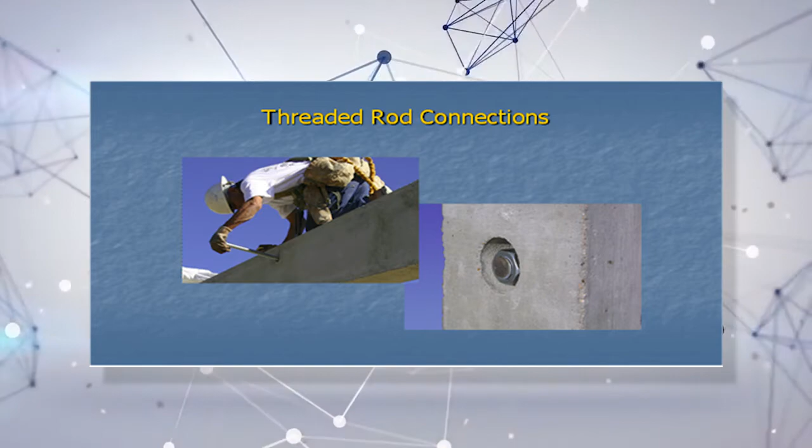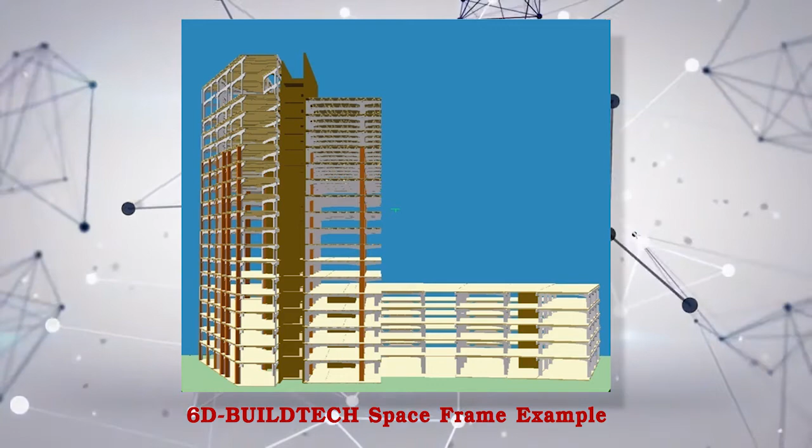The most basic 6D BUILDTECH space frame system includes precast concrete frame and floor elements with two major innovations. First, the space frame system uses precast concrete elements with bolted connectivity similar to that employed in steel building construction. Hardened threaded rods are used to connect the elements without the use of welded embed plates, which have a high fatigue and failure rate. The bolts pass completely through the precast elements.

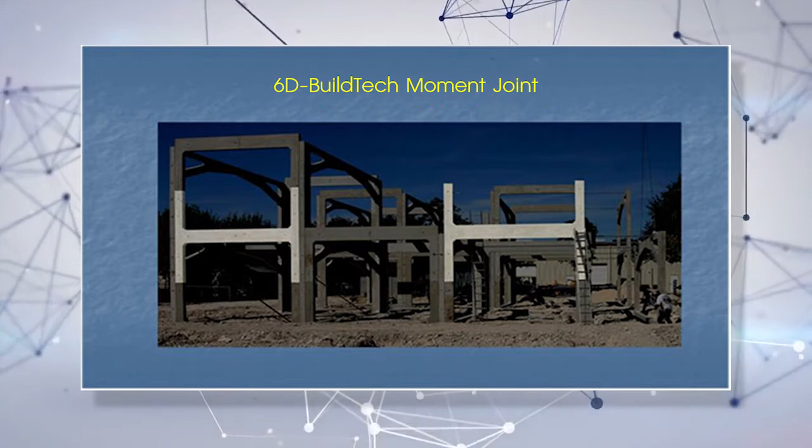BUILDTECH space frame replaces the pin joint in conventional precast using a moment joint. The overlap of the spacer element from mid-floor height on the lower floor to mid-floor height on the floor above transforms the joint into a rigid joint, giving the structure the stiffness to carry lateral loads imposed on the structure.

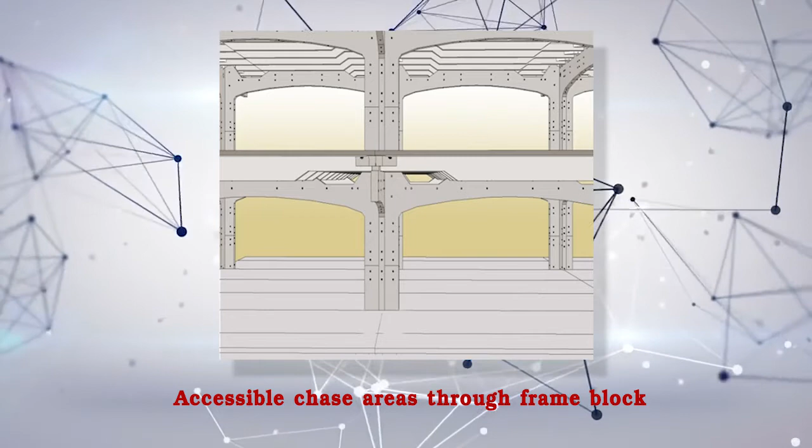Structures built employing this system utilise highly configurable blocks that include the framework, roofs, floors and exterior walls. Structures can be built in time frames not achievable using conventional construction methods. The design and manufacturing of the blocks make them aesthetically appealing, with asymmetric angles, terraces, cantilever porches, etc., more durable than conventional buildings and less expensive to maintain and insure.

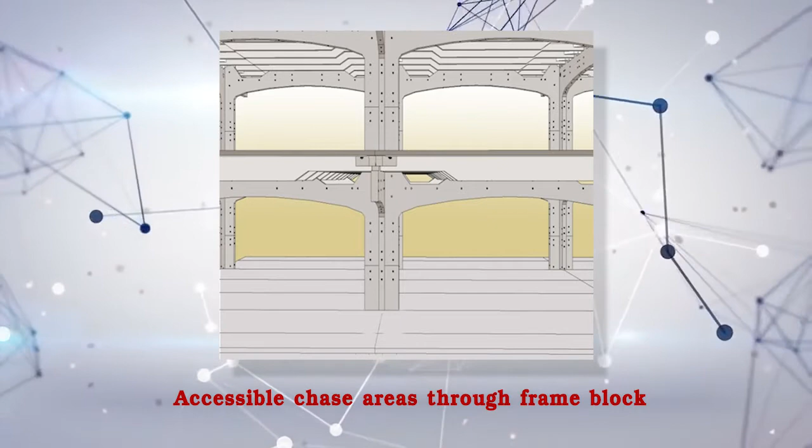BUILDTECH space frame system offers options for readily accessible chase areas for mechanical, electric and plumbing, or MEP. Because all dimensions are modular, components of interior construction, for example partitions, plumbing runs, HVAC units and duct runs, etc., can all be largely prefabricated for finish out of space. When assembled, BUILDTECH delivers a stronger building with fewer maintenance issues.

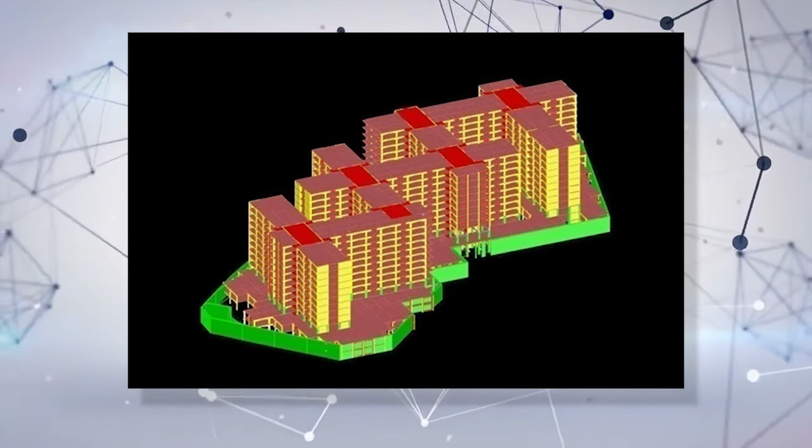6D BUILDTECH space frame advantages. 1. Precast concrete parts with the connectivity of steel. 2. Bolted semi-rigid moment joints versus pin joints used in conventional precast systems. 3. 10+% less materials, concrete and steel. 4. 50 to 70% less labour for space frame. 5. Fast assembly. 6. Eliminates waste. 7. Environmentally compliant and sustainable. 8. Flexible from villas to towers.

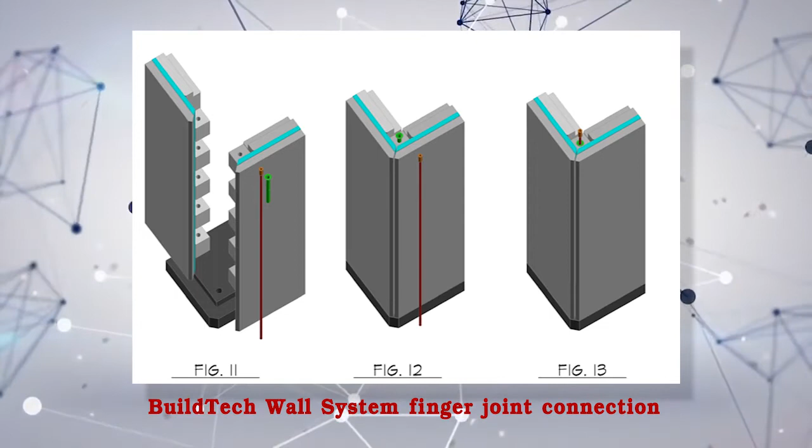The BUILDTECH wall system employs a finger joint pattern that enables the construction of joints to connect to intersecting wall blocks at the ends or along the length of a wall. A pair of walls is immediately stable once a joining pin has been installed. Door and window frames can be installed in the factory. Electrical conduit and other service features such as plumbing and air conditioning routing can be cast into the basic wall and floor panel components.

The BUILDTECH wall system offers continuous insulation of the building envelope. This continuous insulation eliminates thermal bridges present in other insulated precast wall systems on the market.

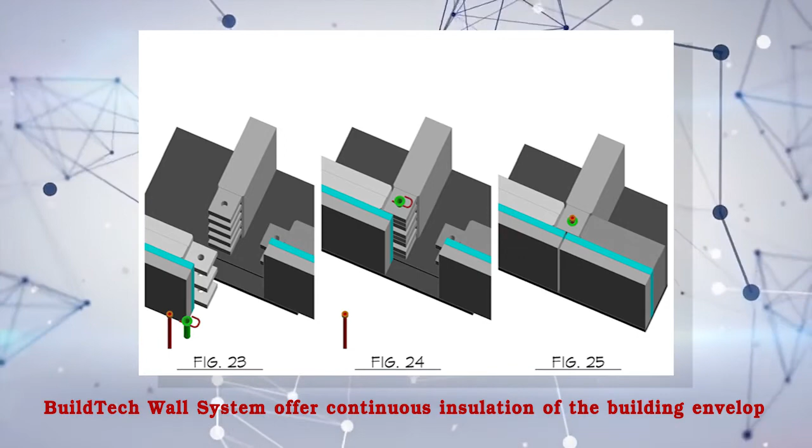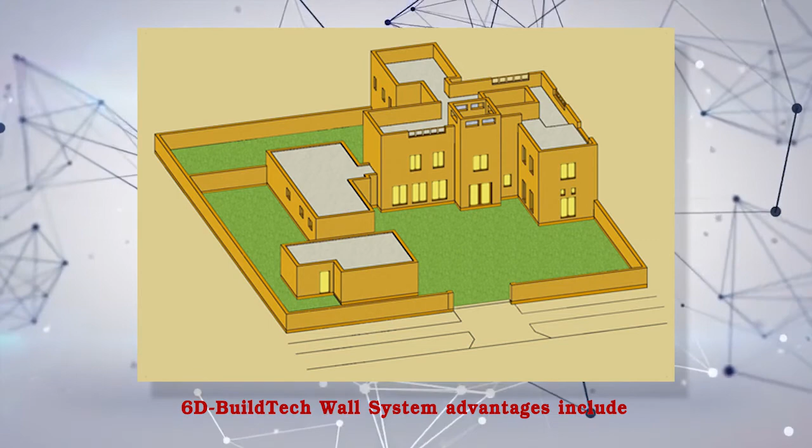6D BUILDTECH wall system advantages include finger joint stability during assembly, continuous insulation, less materials, concrete and steel, 10 to 15% cost savings, 50 to 70% less labour, fast assembly, 80% faster than conventional construction, eliminate shoring and drastically reduce on-site formwork, excellent buildability, speed, safety and cleanliness, eliminates waste, flexible, villas and condos up to 15 stories. MEP conduits can be added at manufacturing stage, seismic zone performance, resist typhoon wind loads.